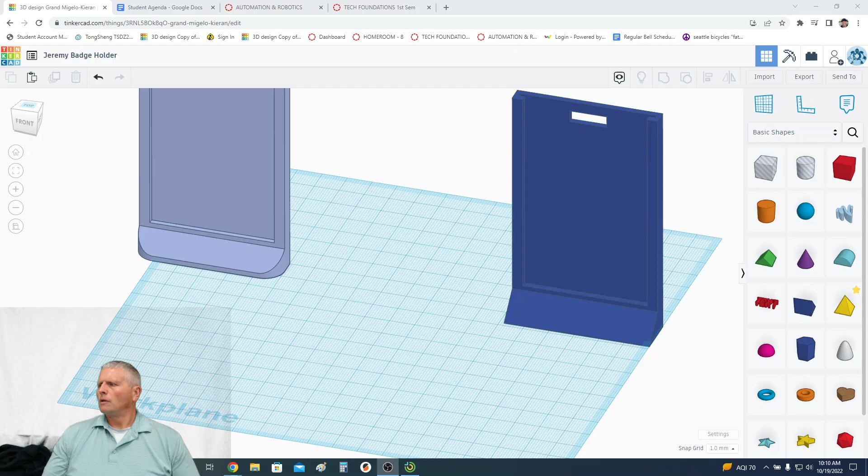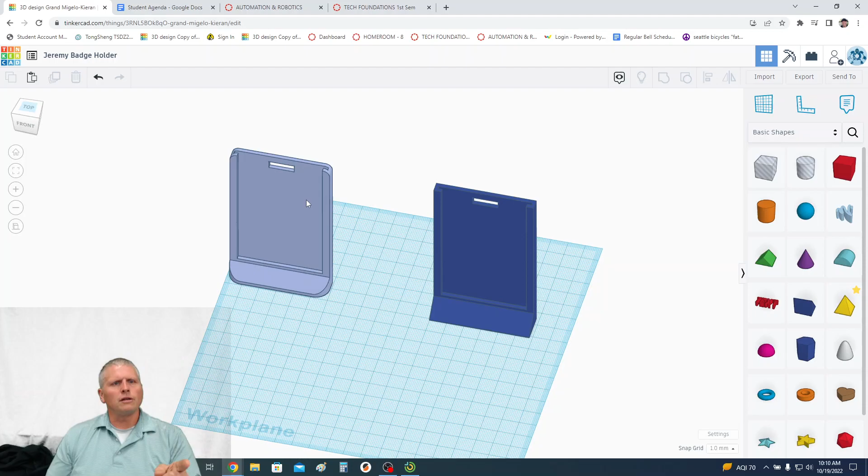In the last video, we ended up with something like this. By the end of this video, I want to show you how to end up with this, and you can see it just looks a lot better. It's going to be rounded off, so it doesn't have sharp edges on it that are really not good for the person who's going to be using it, which is you. Let's break this shape down and see what I did. Let's take a look at this sample one, and then we'll work with this one and start doing the things to make it like the finished one.

And then in the next video, we'll add the text and we'll be done. We're ready to 3D print this if we did it right. So let's go ahead and take a look at what this thing has, what happened to it in between the videos.

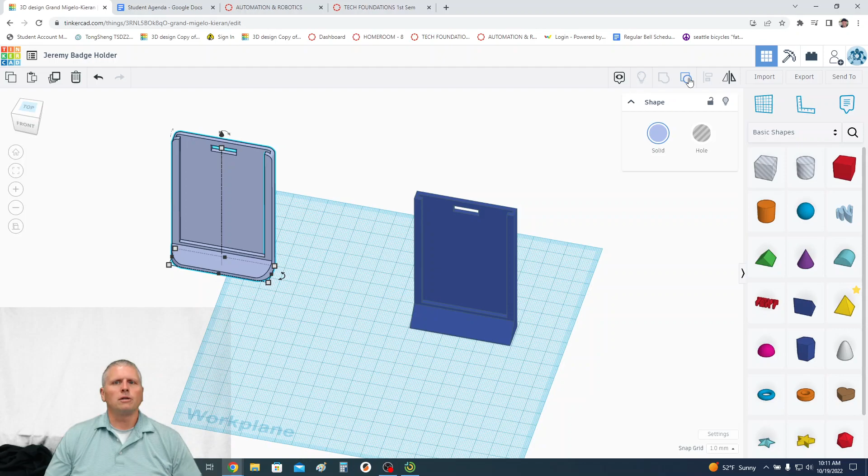Okay, so you can see here, this is what we ended up with. And these other pieces, 1, 2, 3, 4, 5, are what we're going to be adding today.

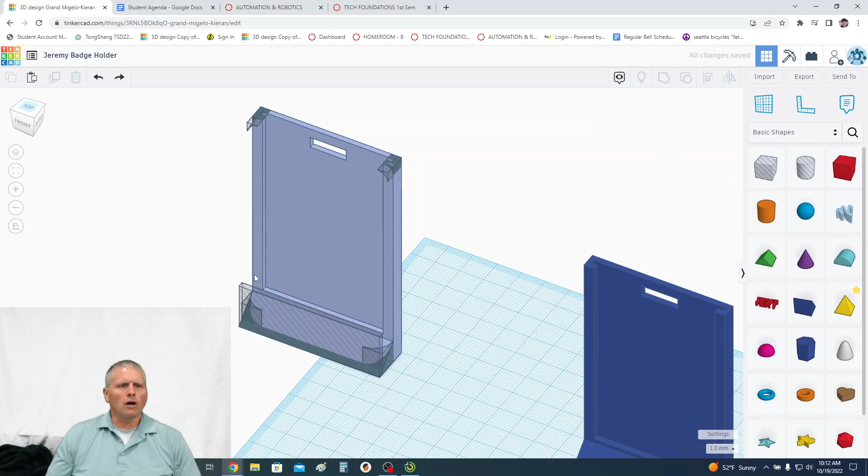Let's see what those things are. These are actually things that will cut off the sharp edge of the front. That's just a box, pretty easy to do. We'll do that first. Then we'll add these, which round off the leftover corners.

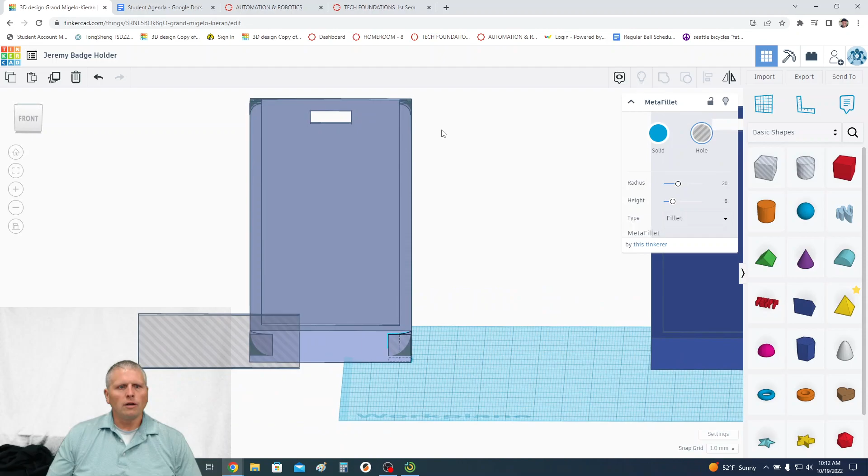These are called meta fillets. I'll show you how to use those. And then we'll make those same meta fillets and move them up top here to round off just a little bit of the corner at the top. And of course, when we're done, it'll look like a badge holder, the way we want it to. Okay, so let's get started.

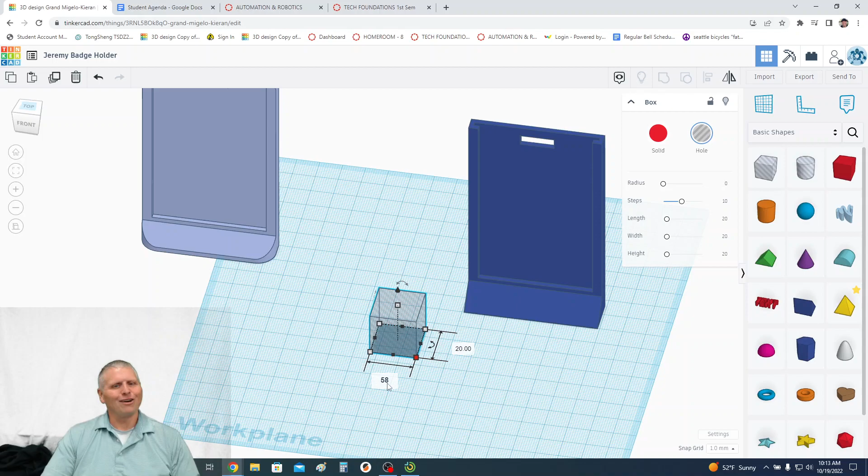First of all, this first part is very, very simple. Remember when we did this, we made this 58 millimeters wide. So I'm going to drag out a box that's a hole already. And I'm just going to click here and go 5, 8 - whoa, backwards - 58, not 85, and 2. All right, there it is.

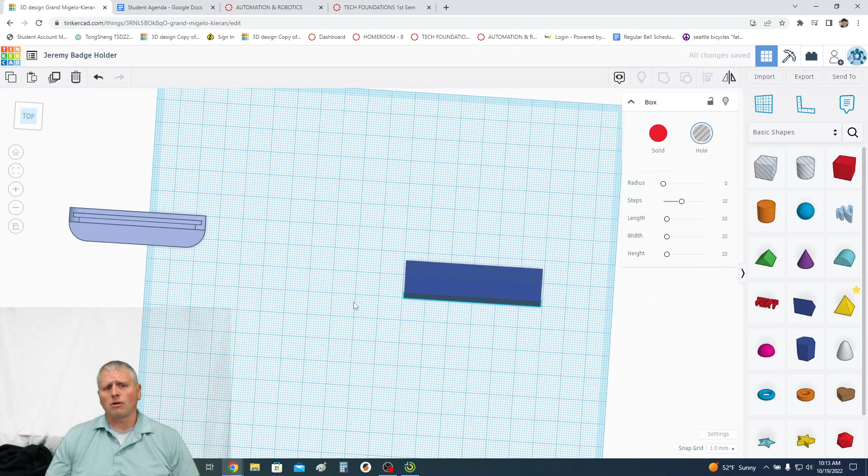And I don't care how tall it is, just leave it there, as long as it's tall enough to cut that little bit off. We don't need much. So on this one, you can use the align tool if you want to, or you can just drag it over there. Now, if you don't have the snap grid turned on, I would leave the snap grid on 1.0 for this entire project. But if not, you could use the align tool as well.

So you click, hold down shift, align, or you press the L key, which is the thing. Click the one you want to hold still. We're going to align it to the front, middle, and it's already aligned where we need it.

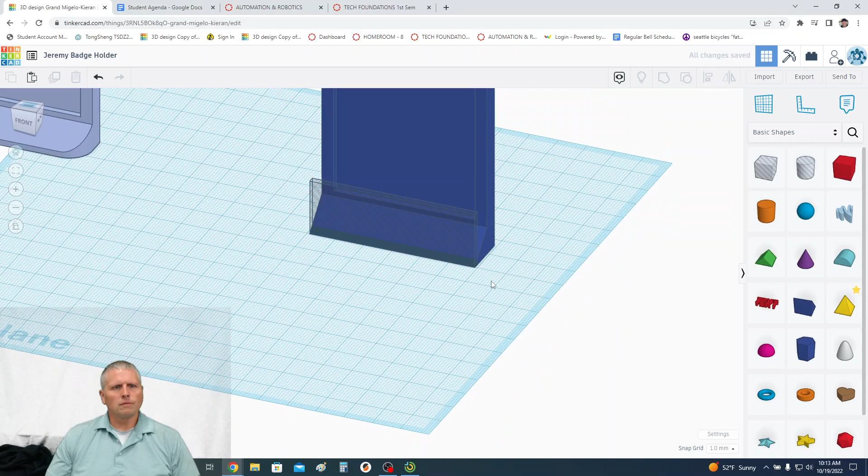Then what this is going to do is cut off that sharp front edge. Let's see what it looks like now. Okay, that's a lot better. That's not going to be able to snag on stuff and get your clothing tangled in it or whatever. Okay, good, that's really awesome.

Okay, so the first thing we're going to do after that is round off the corners. So what we're going to do is go up to this menu where it says Basic Shapes and go down to Shape Generators. Once you're in here...

We're going to click on Search. See this little thing? It says Search Shapes, this little searching button. Click that. Now, once you're up here, you're going to go to Community - make sure it's on Community and not Your Creations. It should be already. Relevant, that's fine.

You're going to click here and type in META. Meta, and press enter. Whoops - okay, so let's try that again. So we're going to click here, and hey, I found a glitch with this: the searching on here won't work unless you change this from Community to Your Creations, and then change it back to Community. Then it seems to work for the search, I think. Yep, so change that away from Community, and then back to Community. Click it, and then back to Community, and that seems to fix the error.

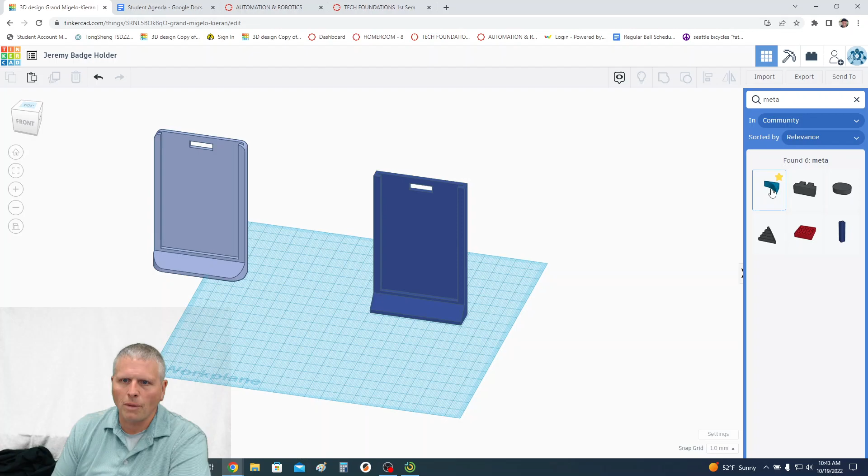And then you type in Meta, and this is the one we want - it's called the Meta Fillet. Yours won't have a star by it; I have a star by it to make sure I know it's one of my favorites. And I'm going to drag out a Meta Fillet, and that's the thing that's going to cut the corners for us.

But we have some work to do first. Let's rotate this thing by clicking this, and this will spin it around. I'm going to drag it and keep my mouse on the inside so it sticks to these big ones - if I go out here, it gets really hard to get it right. I'm going to keep it on the inside of the circle and make sure it's at 90 degrees. There it is, okay, cool.

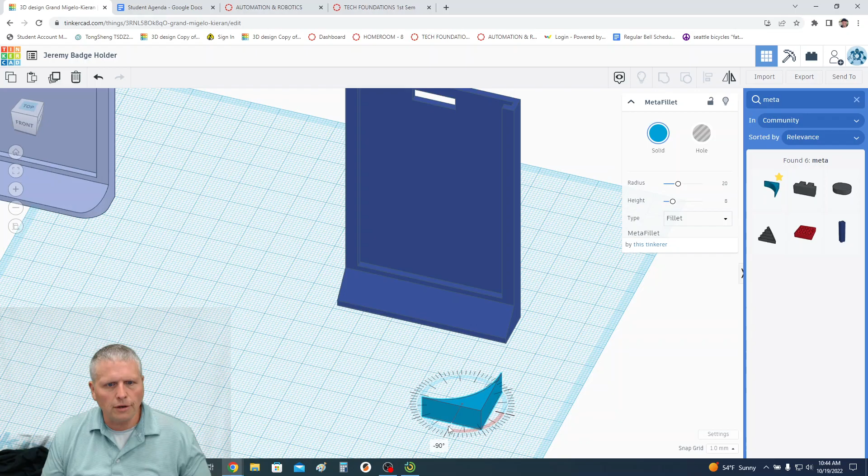Now this sticks out by 8 millimeters. So I'm going to click the corner and we're going to type in 8, tab, 8, enter.

So 8 by 8 is the size that we need. And I think this should be fine at, what is it? 8 millimeters tall should be fine.

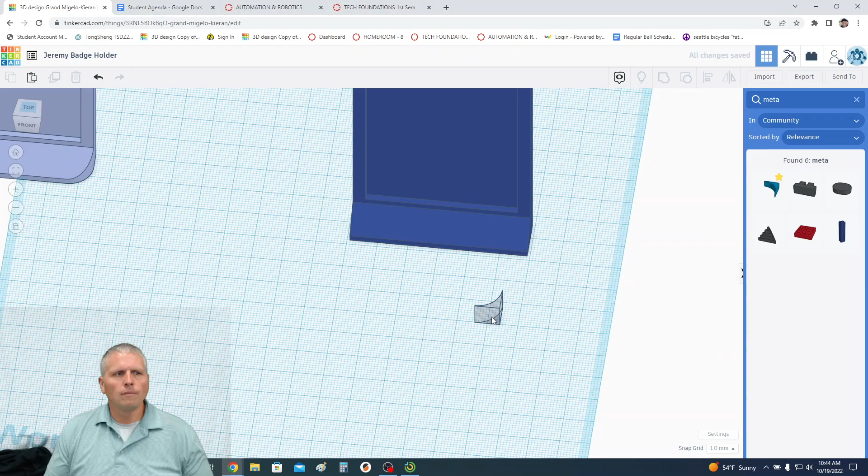So what I'm going to do is change this into a hole, and move this—click here, hold down Shift and click this one. I'm going to use the Align tool by pressing L or clicking the Align button. I need to tell it, hey, I want this one to move to this one. So I click the one I want to hold still. That's this, and then we can align it.

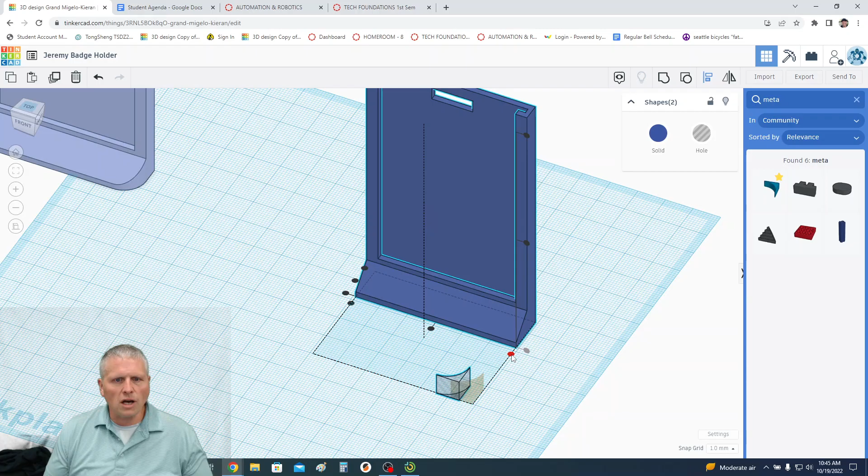We're going to align it to the right side, all the way to the front. And then we have to have it at the bottom. If it's not, it should already be lined up at the bottom. But then it's going to be lined up perfectly just like this.

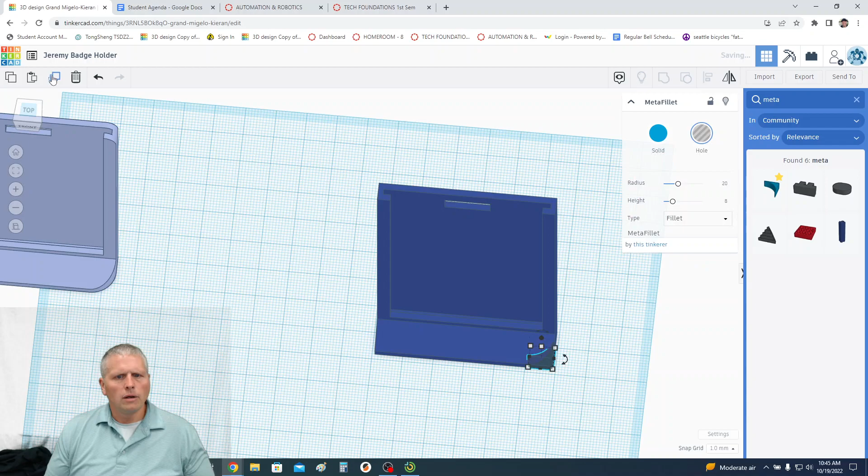Okay, and then I'm going to take that, click that shape, and duplicate it up here. Now remember, when you duplicate, you're not going to see it because it's hiding inside of itself. So I'm going to use my arrow key to move that duplicate, the copy, over here. Get a top view—that's pretty good. And then rotate it 90 degrees this way. So there, now it's lined up the way we want it.

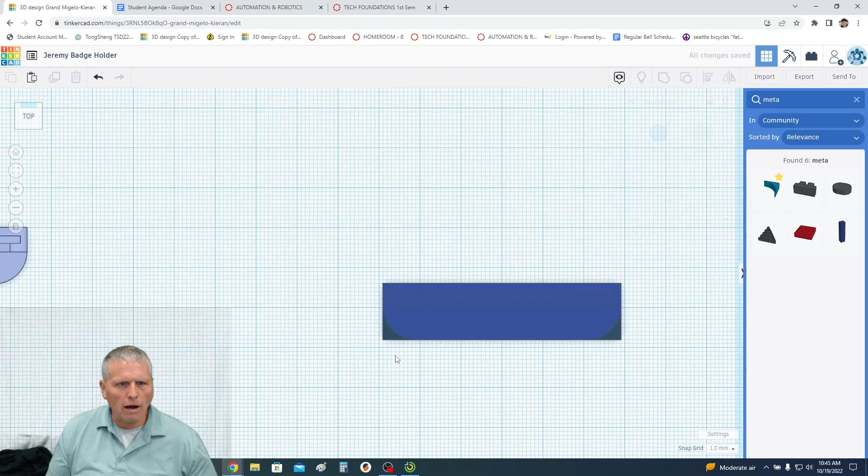And I'm going to grab all of this stuff, and let's see what it looks like when I group it together. Might take a second. Hey, that looks great. Really smooths out this shape and makes it look really nice. Okay, cool. Let's ungroup that, and we can get these.

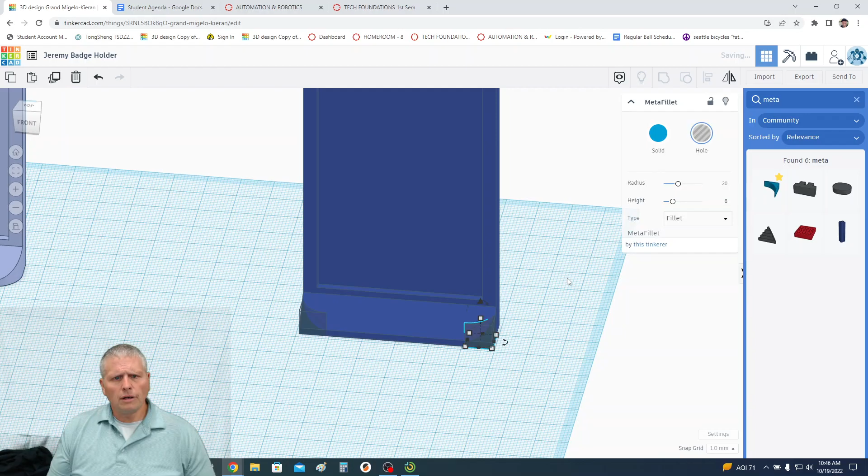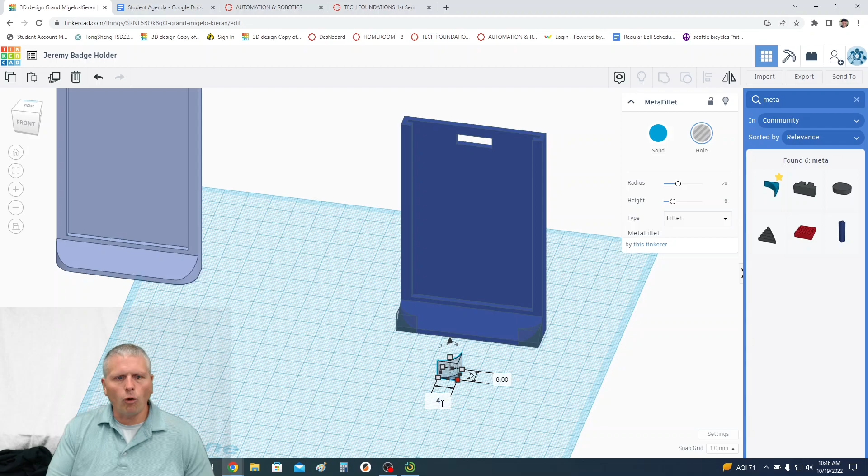What I'm going to do is take this and make a duplicate. Now this duplicate, I'm going to move it out a little bit, keep the old one there, and we got those right there. Now look, we need to change the size of this. For this top part, where we're going to round off these corners, this is only 4 millimeters. So instead of 8 by 8, we're going to change this one to 4. So it's going to be 4, tab, 4, enter. Oh wow, really small, but that's all we need, really.

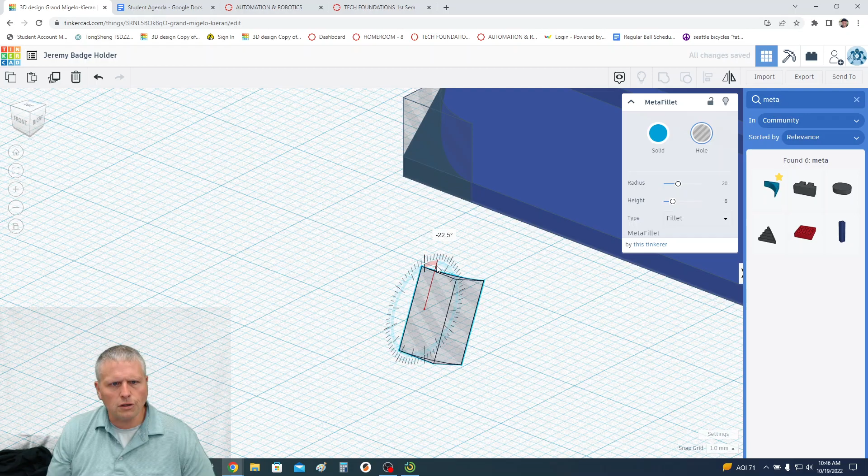So I'm going to click that and get a side view. And we need to knock this thing over so it's rolled onto its side. Now it's hard to do unless you really zoom in here. So you can grab the one you really want, and I'm going to zoom it down because it's so small, you really got to zoom in. There we go, 90 degrees. Now is that the way we want it? Yeah, I think it is. That's going to face the correct direction.

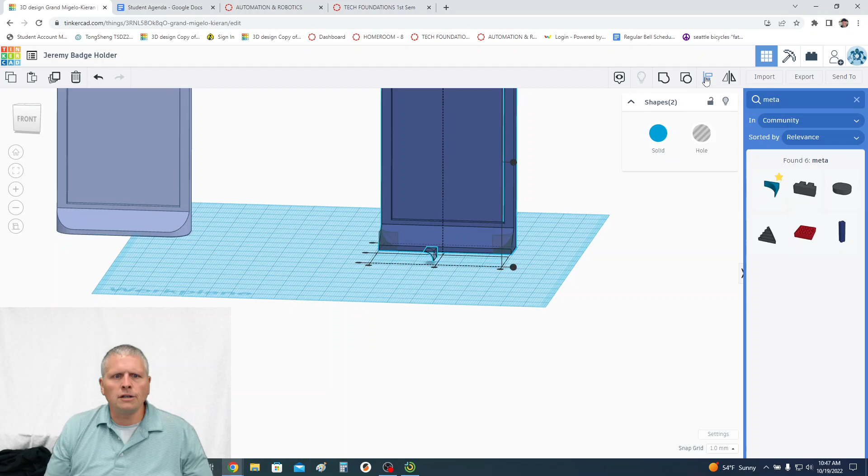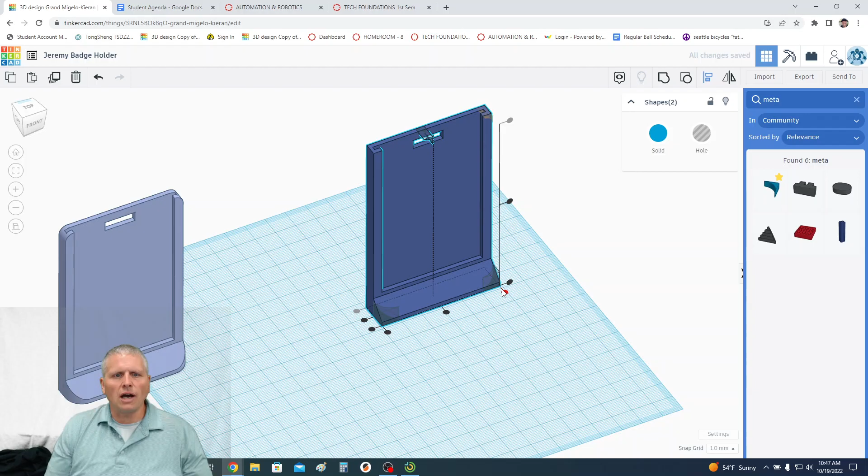So I'm going to grab this, hold down Shift and grab this, and then use the Align tool. I want this thing to stay still, and I want the little piece to move to it. So I click the big piece, and I'm going to make it all the way at the top—so click this one. I want to make it all the way at the back—so I have to click this back one. And then all the way at the right side, so I click this one. And that's where we want it.

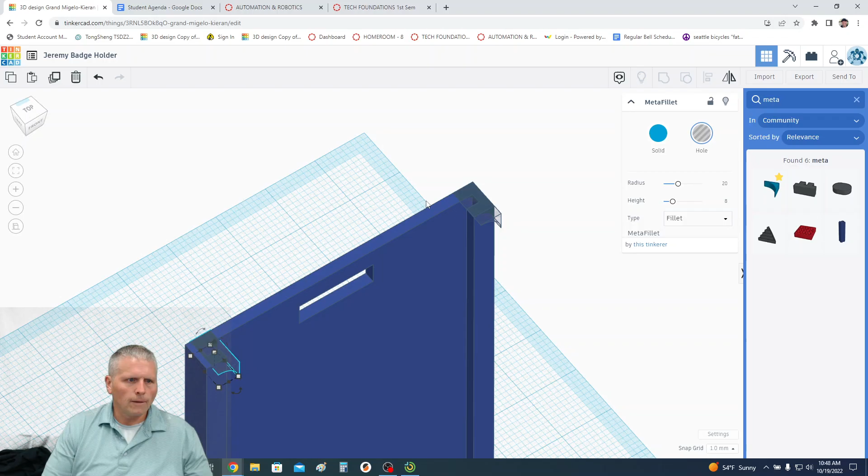But before you do anything else, let's save some work and zoom in. We'll click just this thing, get this out of the way, and I'm going to click the duplicate button. And then we're going to use our arrow keys to slide it over. You can hear me pressing the left arrow—could be the right arrow depending on how your screen's set up.

Okay, I'm going to zoom in, and this is backwards. This is not going to cut correctly. Look, it's like if we cut this right now—look, this is not right. Okay, we need to rotate this one. This one's cool, but this one needs to be rotated. So let's undo that cut.

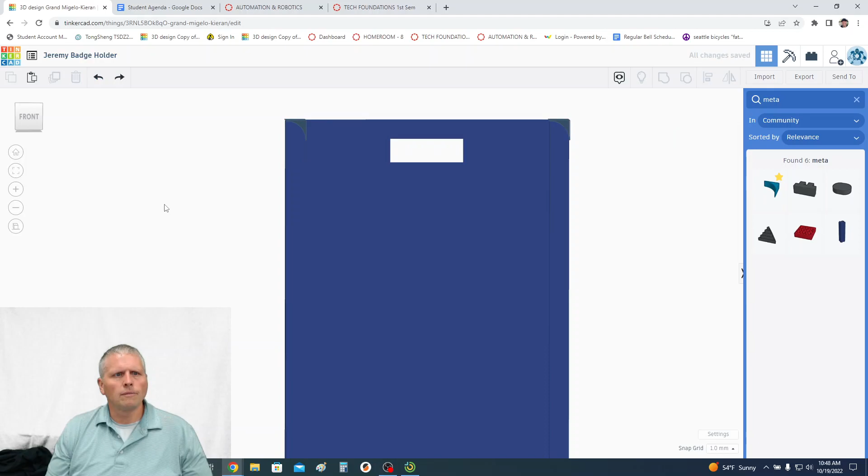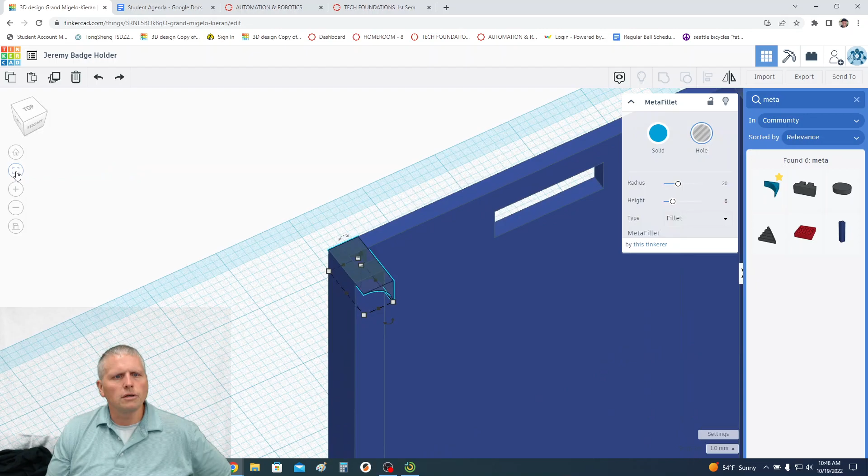Let's click the piece, and we're going to grab—you have to really zoom in. There's the arrow we want. Nope, that's not enough, you really need to zoom in bigger. Do you know another trick that's really awesome? You can zoom in like this. So you click this piece, and then this second button down here underneath Home, Fit View to Selected Shapes, and it zooms in like a good view for that shape.

Okay, now where's that spinner? Here it is. I'm going to rotate that until it's 90 degrees exactly. Don't get it close enough, get it exact. And it's already lined up. Hey, look at that, it worked out good—it lined up with the back. If not, you might have to align it.

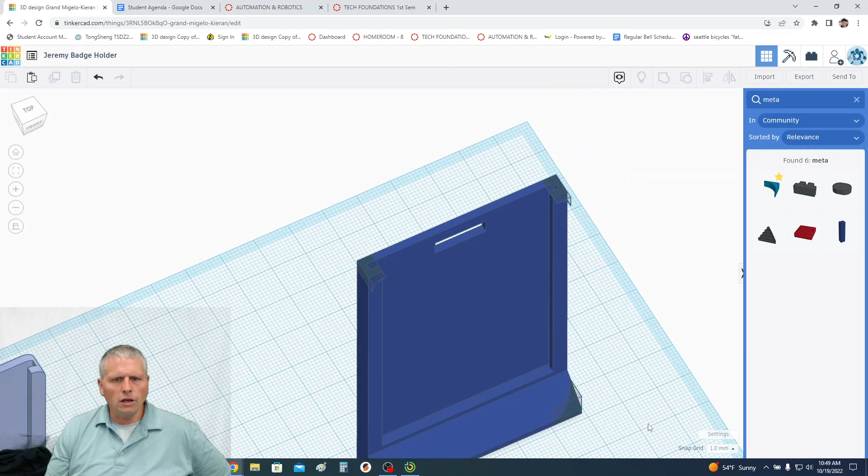Okay you guys, now let's look at this thing. We got all of it, and we're going to group it together, and let's see how we did. Yep, that's what we want, looks nice and smooth. We get a top view, and we can see that that's all rounded off, and the sharp edge on the front is cut off.

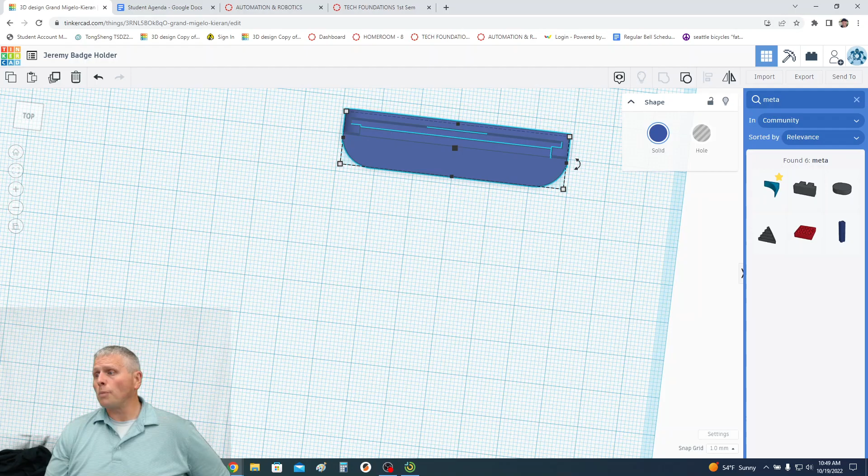Hey, this is the hardest part, so if you're done with this, you've just done the hardest part of the whole project. That's why this video took a little bit longer to explain.